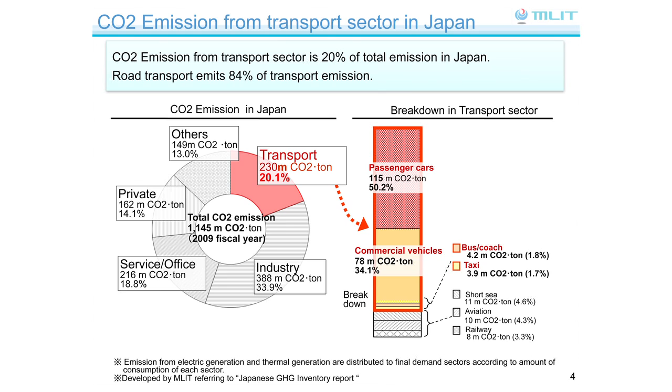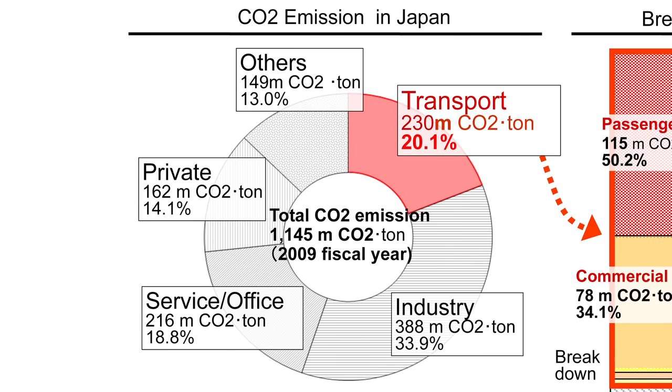First, let me explain the background of the Japanese CO2 emissions situation. This left chart shows the amount of CO2 emission from all of Japan. The amount of CO2 emission from Japan is about 4% of the world. As you can see, 20% of CO2 emission is coming from the transport sector in Japan, and 84% of that is coming from automobiles, as you see in the right bar chart. So policy for reducing CO2 emitted from automobiles is a big key to tackle global warming in Japan. Next, please.

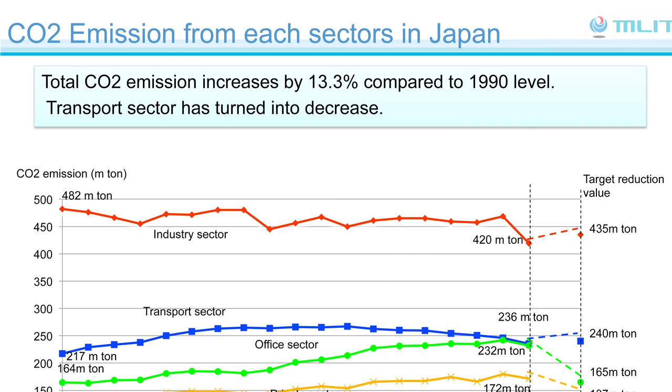This is the amount of CO2 emission from each sector in Japan between 1990 and 2008. Total CO2 emission increased by 13.3% compared to the 1990 level. But as you see, the transport sector, the blue line, has turned into decrease, while the office sector, the green line, and the private sector, the yellow line, have been increasing.

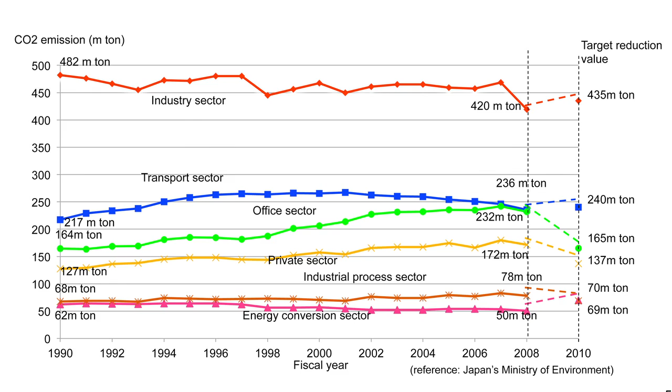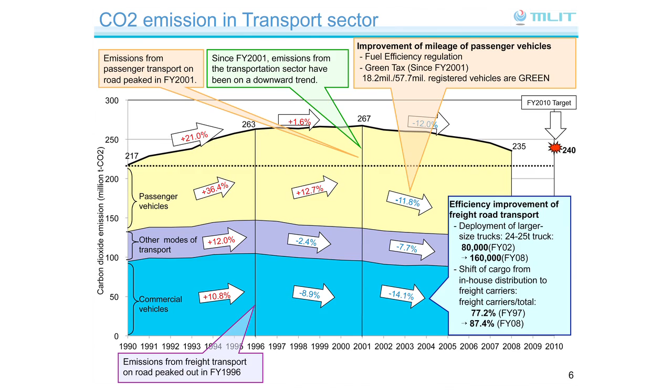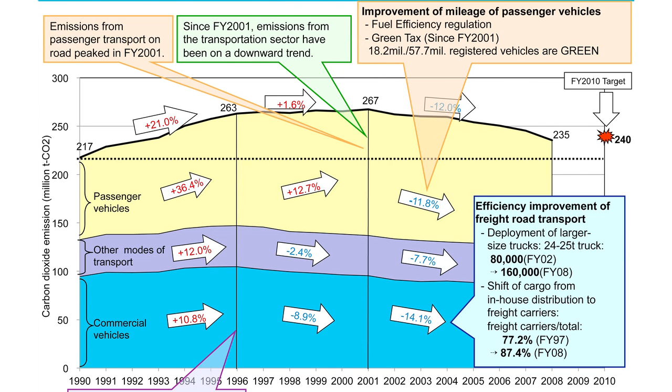This slide shows the trend of the amount of CO2 emitted from the transport sector. The total amount of CO2 is reducing from 2001. Regarding passenger vehicles, the yellow part, the amount of CO2 is reducing from 2001 too. And the amount of CO2 from commercial vehicles, the blue part, is reducing. This peak was in 1996. We think this successful situation is a very rare case in the world, and this is a result of our policy, of course, with the effort of automobile manufacturers and transport companies.

To achieve such a situation, several policies contributed, such as fiscal incentives, improvement of efficiency in the way of freight transport, and the promotion of eco-driving. I'll show you those policies later. And especially, one of the most important policies, we think, is fuel efficiency regulation.

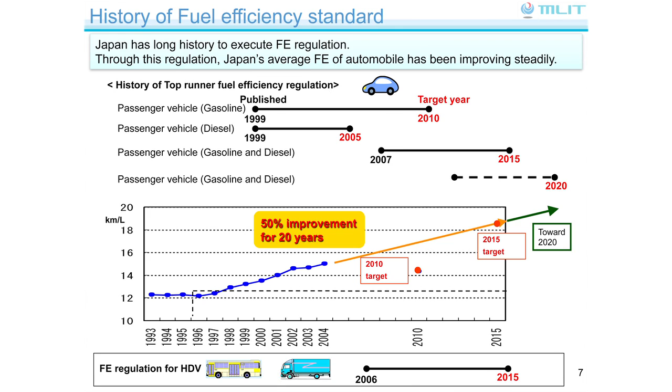Next, please. This slide shows the history of our automobile fuel efficiency regulations. Originally, fuel efficiency standards for passenger vehicles started in the 1970s. The oil crisis in the Middle East was the trigger for starting the fuel efficiency standard. By this regulation, average fuel efficiency has been steadily improving. The latest standard for passenger vehicles is targeted for fiscal year 2015. Last month, we announced a new passenger vehicle standard toward fiscal year 2020. This will be stipulated around next spring.

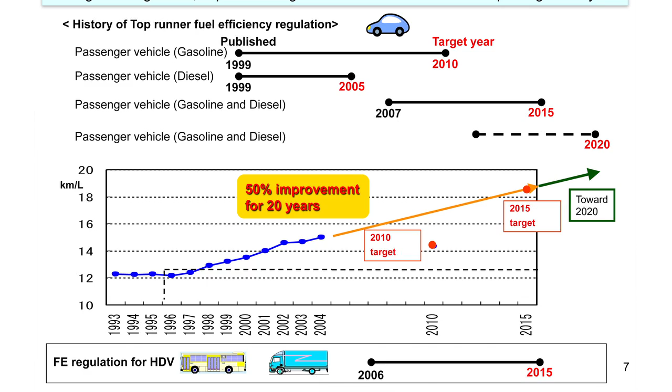And Japan introduced fuel efficiency regulation for heavy-duty vehicles in 2006 for the first time in the world, which is today's main topic. Next, please.

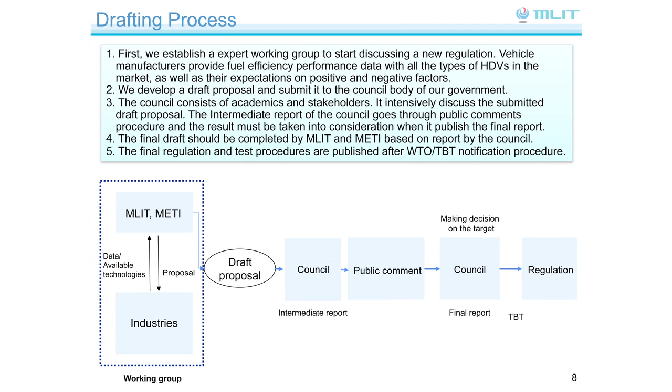Next, I'd like to explain the drafting process of fuel efficiency standards. First, we establish an expert working group to start discussing a new regulation. Vehicle manufacturers provide fuel efficiency performance data for all the types of HDVs in the market, as well as their expectations on positive factors and negative factors. Positive factors are such as available technologies and their estimated prevalence in the proposed target year. The negative factor is the regulatory impact of emission or safety regulations.

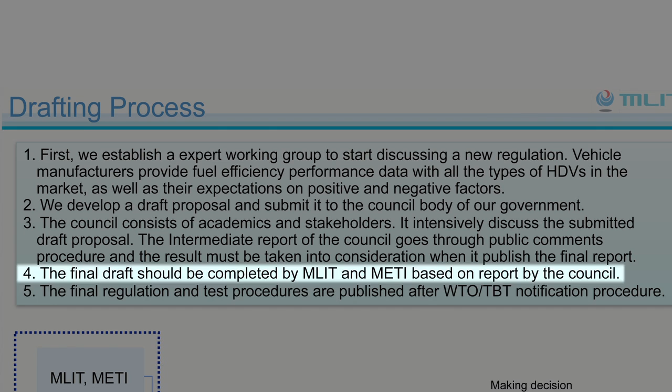We develop a draft proposal and submit it to the council body of the government. The council consists of academics and stakeholders. It intensively discusses the submitted draft proposal. The intermediate report of the council goes through a public comment procedure, and the result must be taken into consideration when it publishes the final report. The final draft should be completed by MLIT and METI based on the report by the council. The final regulation and test procedures are published after WTO TBT notification procedures.

Okay. Besides, I'd like to show you our top-runner approach. This slide shows how the top-runner standard is set. The top-runner approach is a fundamental concept to make the fuel efficiency standards.

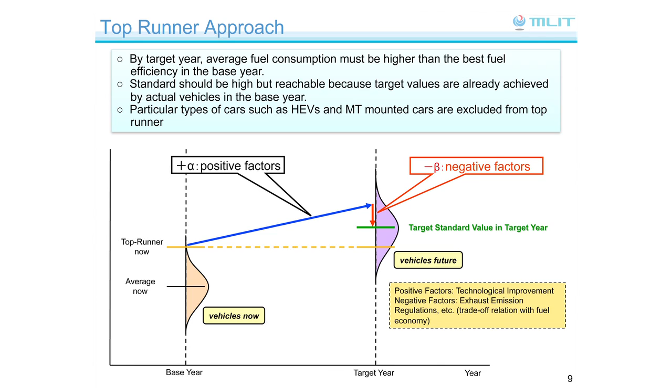Target standard values have been determined based on the fuel efficiency of the most fuel-efficient vehicle which was on sale at that time. In addition, positive factors such as technology improvement of engines or transmissions, and negative factors caused by exhaust emission regulations and so forth, have been considered.

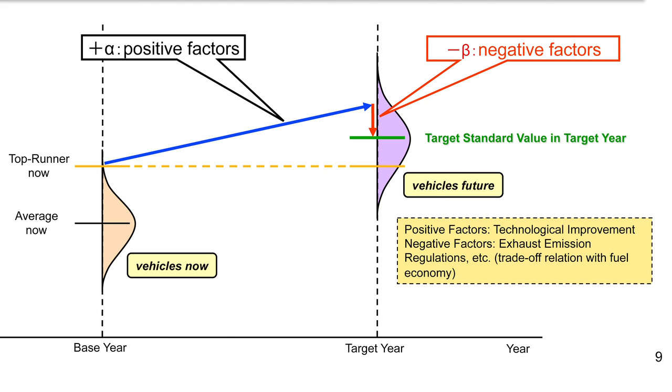The fuel efficiency strongly depends on vehicle weight, thus the target standard values are classified into some categories by gross vehicle weight. Okay, that's the end of the background of fuel efficiency standards. So let's move on to our test procedures.

Next, please. In Japan, fuel efficiency of heavy-duty vehicles is measured by engine dynamometer, not using the whole vehicle. The fuel efficiency map of an engine is measured by this instrument, and fuel efficiency is calculated by computer simulation using the fuel efficiency map and vehicle specifications.

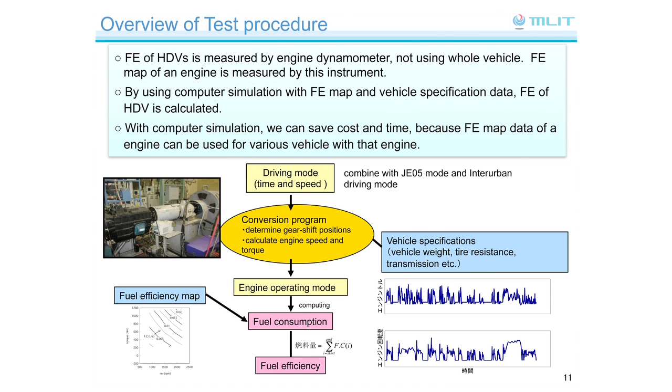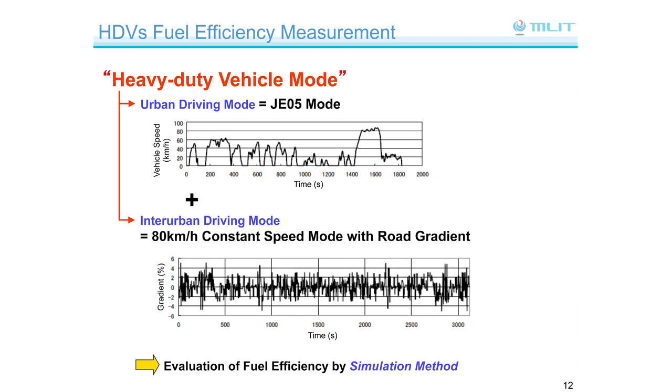For the fuel efficiency test, a mode called the heavy-duty vehicle mode is used in Japan. This mode includes two modes. One is the urban driving mode, and another is the inter-urban driving mode. Urban driving mode is the same as the JE05 mode, which is used for the emission standard. And inter-urban driving mode is an 80 km/h constant speed mode with road gradient.

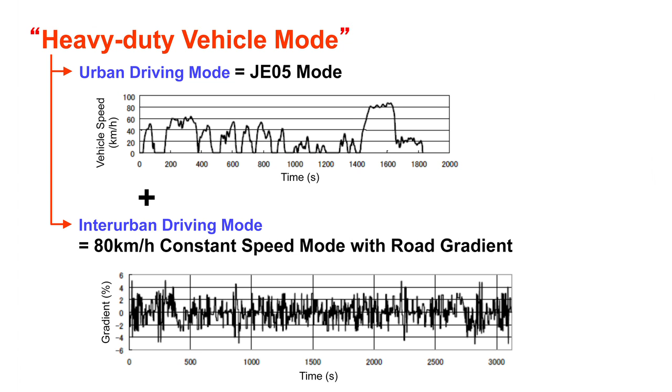The black profile in the below chart indicates the road gradient history of the inter-urban driving mode. We combine these two driving modes in the fuel efficiency test.

If you do the test by an actual engine bench test or an actual chassis dynamometer, the test is impractical because it takes large resources, time, labor, and money for manufacturers to construct the testing facility and to perform measurement. Therefore, we do the fuel efficiency evaluation test by the simulation method.

An overview of the simulation method is shown here. This method includes two phases. One is a phase of conversion from vehicle speed to engine speed and engine torque. This phase is used in the emission test by JE05 mode. Another one is a phase of calculation of fuel efficiency.

In the first phase, we convert the driving mode to an engine operating mode with engine speed and engine torque by the conversion program. In the process of this conversion, detailed vehicle specifications are input to determine not only histories of engine speed and torque, but also gear shift positions.

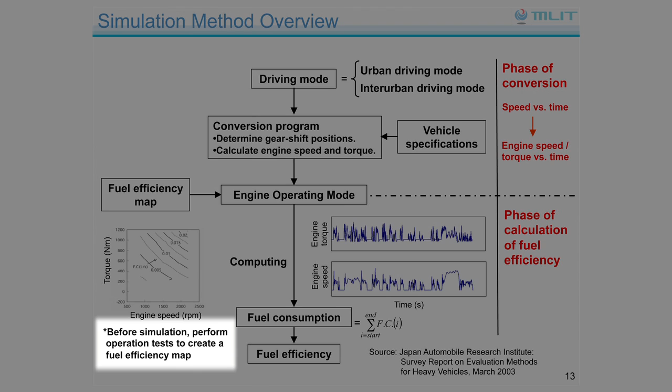In the second phase, fuel efficiency is calculated from profiles of engine speed and engine torque. In this case, we need a fuel consumption map, which has fuel consumption values against the engine speed and engine torque. Before the simulation, we have to create this map by steady-state engine operating tests.

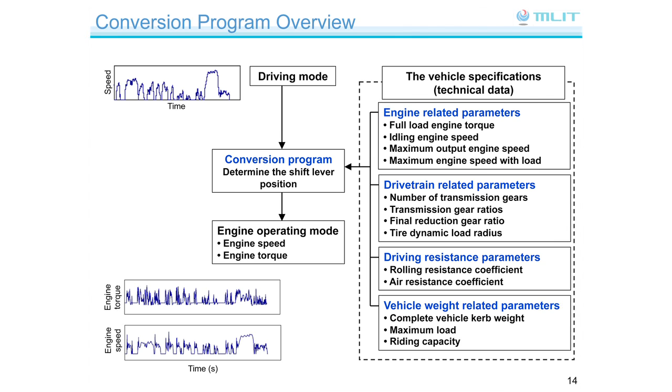And in the conversion process, we have to determine the gear shift position. To determine the shift position, much information and data are necessary. The vehicle specifications are divided into four categories: engine-related parameters, drivetrain-related parameters, and driving resistance parameters. And the last one is vehicle weight-related parameters.

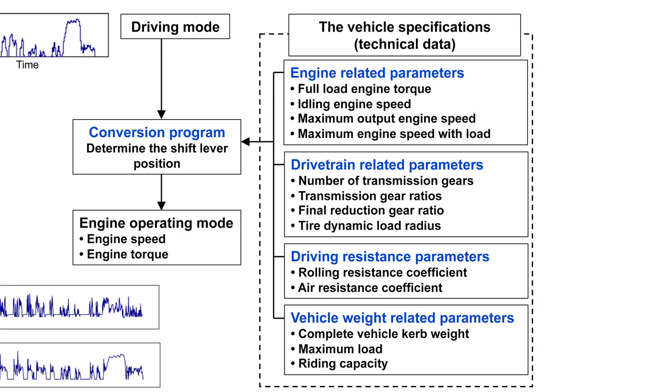By using these parameters, we determine the gear shift position in driving modes and acquire engine speed and engine torque profiles. And here, let me explain the meaning of the name of the simulation method. This name is apt to be misunderstood. The meaning is that the whole method is not an actual engine measurement test by driving mode.

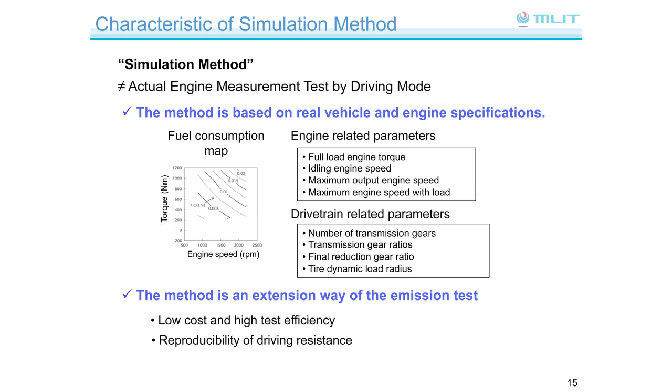Of course, the simulation is based on real vehicle and engine specifications, and in using this method, we must obtain the fuel consumption map of the engine by a steady-state engine bench test. This method is an extension of the emission test by JE05 mode, so the fuel efficiency test has low cost and good test efficiency.

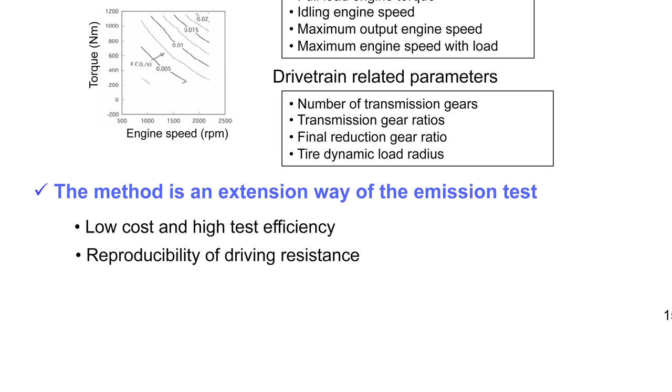At the same time, the method has problems of reproducibility of the driving resistance value of the actual vehicle, because the test includes a conversion process from vehicle speed to engine speed and torque.

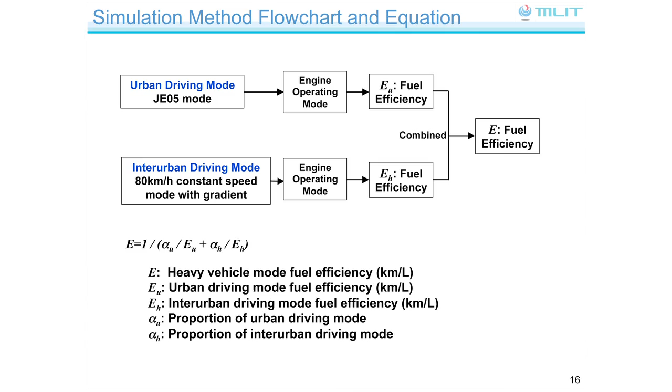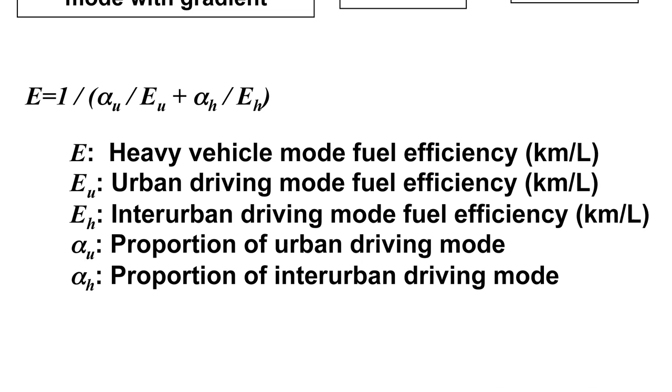This slide shows a flowchart of the simulation method. Fuel efficiency values of urban driving mode and interurban driving mode are calculated by the simulation. And finally, we combine these two fuel efficiency values. To combine them, we use this equation and prepare two coefficients, αu and αh. These two coefficients indicate the driving distance proportions of urban driving mode and interurban driving mode.

Driving distance proportions αu and αh have been determined according to 7 kinds of vehicles. Passenger vehicles are categorized into 3: ordinary bus with GVW of 14 tons or less and over 14 tons, and route bus. And freight vehicles are categorized into other than tractor with GVW of 20 tons or less and over 20 tons, and tractor with GVW of 20 tons or less and over 20 tons.

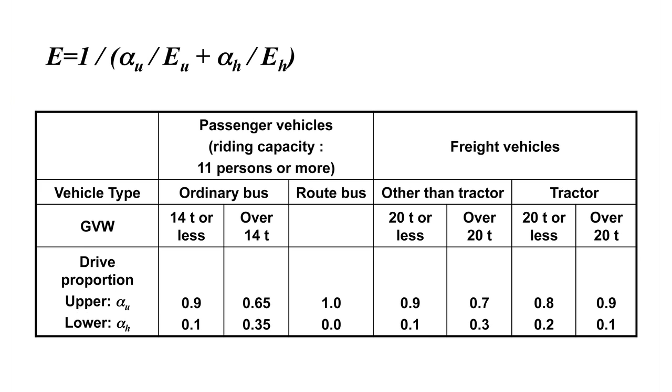Total fuel efficiency of heavy vehicle mode is calculated from the fuel efficiency of urban driving mode, that of interurban driving mode, and the proportion shown in this table. Okay, that's the end of the test procedures. Next, I want to show the target values improvement.

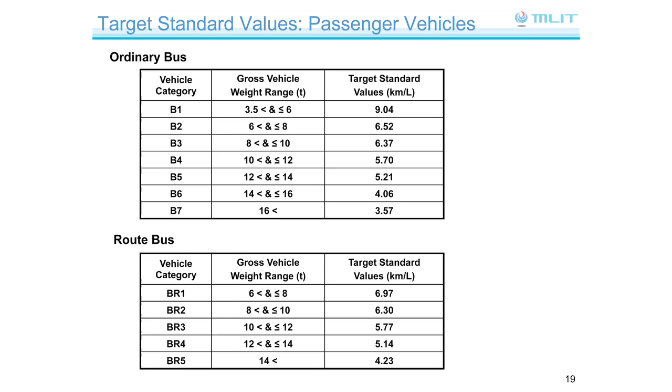The number of types of buses is fewer than that of trucks, and the manufacturer hadn't introduced new models yet, because they care about the timing of the reinforcement of emission standards.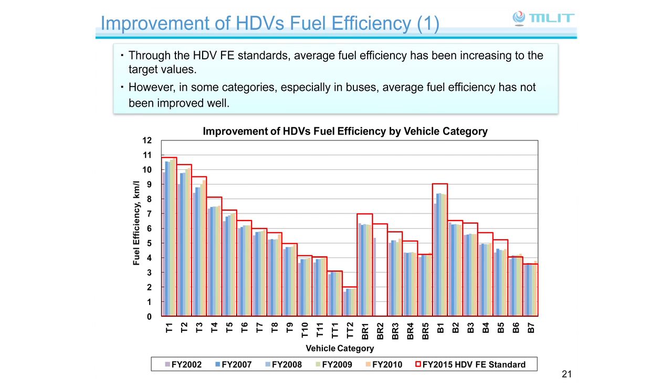The second graph showed the average improvement of heavy-duty vehicles between 2002 and 2015. As for the average, fuel efficiency is steadily improving from 2002 to the fiscal year 2015 target. Therefore, we think that the two sets of fuel efficiency target values are effective to encourage auto manufacturers to develop new technology and improve fuel efficiency.

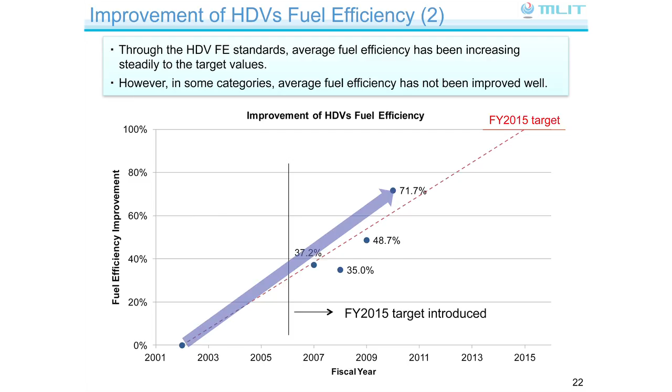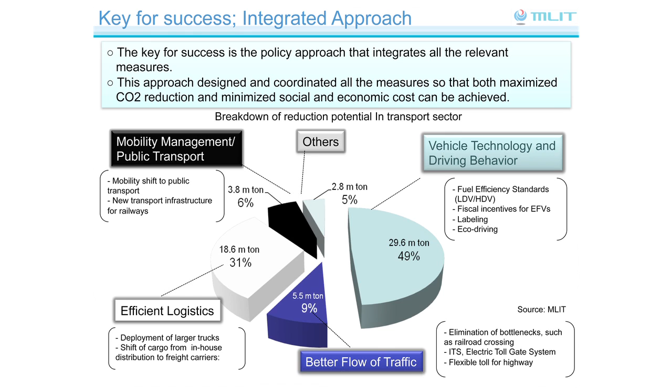Finally, I'd like to explain our integrated approach. The key for success is an approach to integrate all the relevant measures in a coordinated way. We have a variety of elements which affect performance of the transport sector, not only vehicle technology, but driving behavior, traffic flow, and efficient logistics and mobility management. We need evolutions for all the elements for the better future of transport, and all the measures must be incorporated in a coordinated manner.

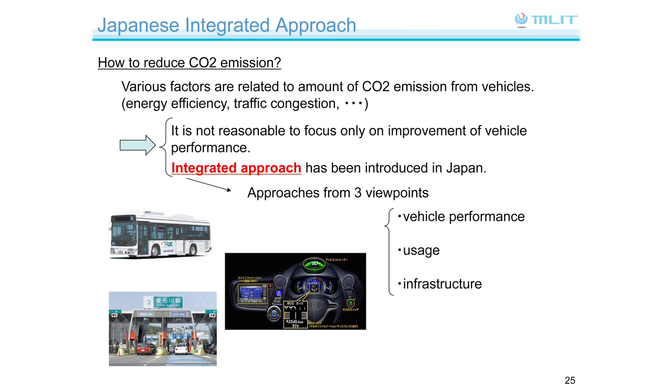Considering the measures for reducing CO2 emissions from motor vehicles, reduction of emission from the vehicle alone is almost always argued first. In particular, improvement of fuel efficiency is argued. We of course do not deny this, and there is no doubt that it's an important element. However, we believe that it's not the best approach to implement measures focusing only on the improvement of motor vehicles alone. Thus, the concept of integrated approach was introduced in Japan.

And first, I'd like to explain incentive measures for promotion of purchasing fuel-efficient vehicles. Japan has tax incentives for vehicles which meet high fuel efficiency levels. Such incentives include reduction of the tax burden on the acquisition and possession of these vehicles. We call this the green taxation system.

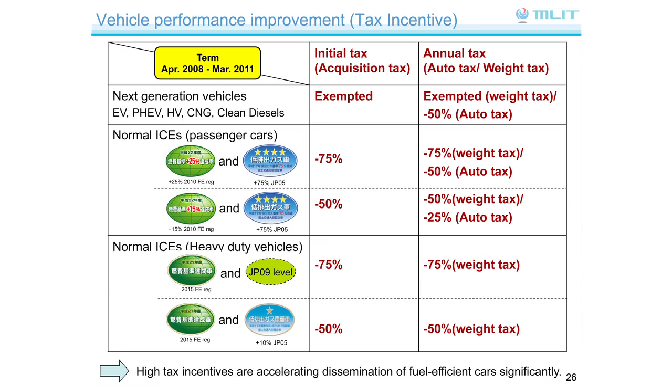Japan has been promoting popularization of fuel-efficient vehicles, not only by regulations, but also by incentives utilizing this kind of taxation system and labeling or sticker scheme. We provide subsidies to automobile carriers when they change old vehicles to eco-friendly vehicles, such as electric vehicles, plug-in hybrid vehicles, and CNG trucks and buses.

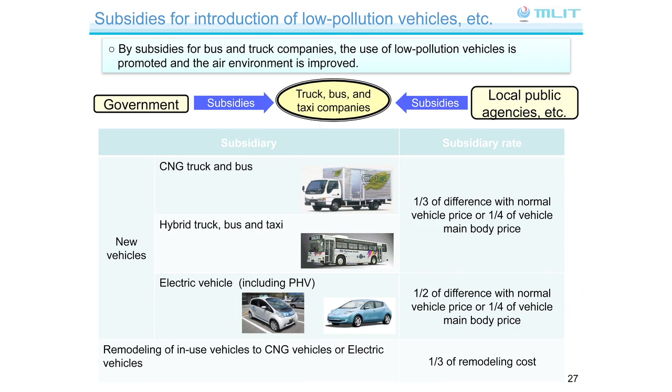And also, I'd like to explain the promotion of eco-driving as an example of usage improvement. Eco-driving is one of the most effective measures. It significantly contributed to fuel efficiency and CO2 reduction by 10% on average in Japan. Campaigns and educational programs should be an important element as well as in-car equipment to assist eco-driving.

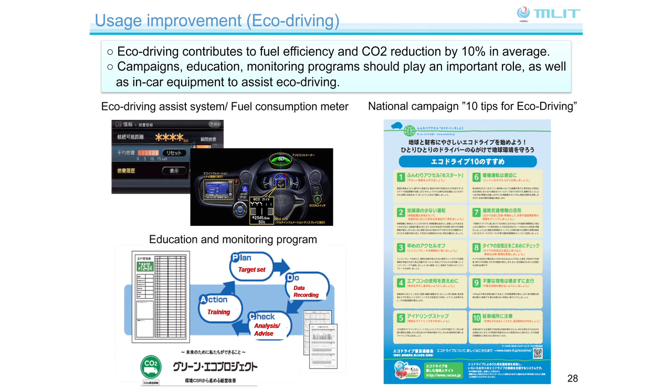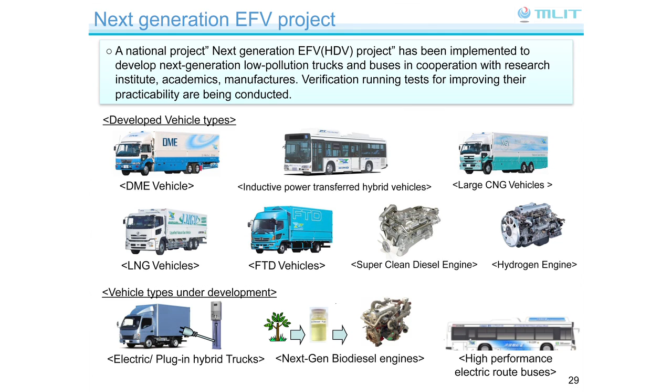And we have been implementing the next generation EFV project to encourage the manufacturers to develop next generation heavy-duty vehicles since fiscal year 2002. Until now, we developed 7 types of next generation heavy-duty vehicles, and demonstration experiments were conducted by automobile carriers. Now we are developing plug-in hybrid trucks and high-efficiency hybrid trucks, next-generation biodiesel engines, and high-performance electric buses in industrial, government and academic research groups.

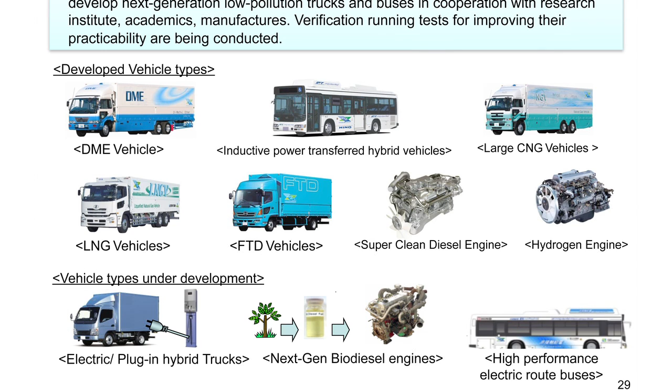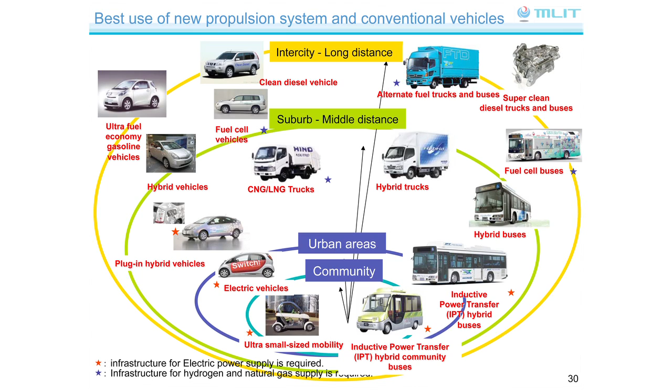And we have to make the best use of EFVs according to the technological specifications of each type of vehicle. The main field for electric vehicles and plug-in hybrids could be limited to urban areas due to the limitation of energy density and driving range per charging, though they have an advantage in environmental performance there. It also means we will have to be dependent on ICE technologies even for the future, considering required driving range or loading capacity. In this sense, improvement of ICE technologies, especially for HDVs, must be focused and pushed more for the sustainable future of transport.

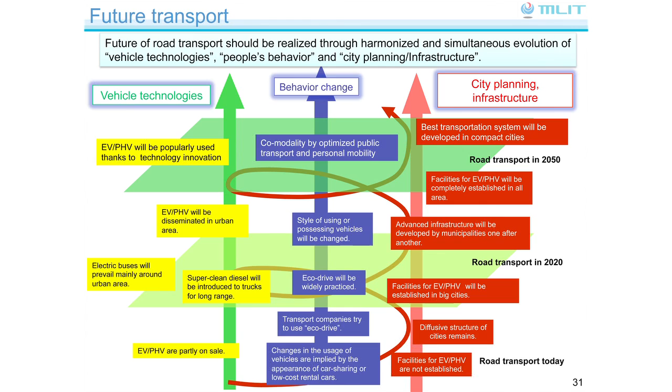And I have given several examples so far, but these approaches are not independent of each other. In an integrated approach, it is important to make these approaches interactive in order to provide the most efficient measure. This is a concept towards the future transport. We, the government and automobile industry, should seek harmonized and coordinated evolution of all the elements towards zero-emission technology-based model mix and compact cities. And that concludes my presentation.